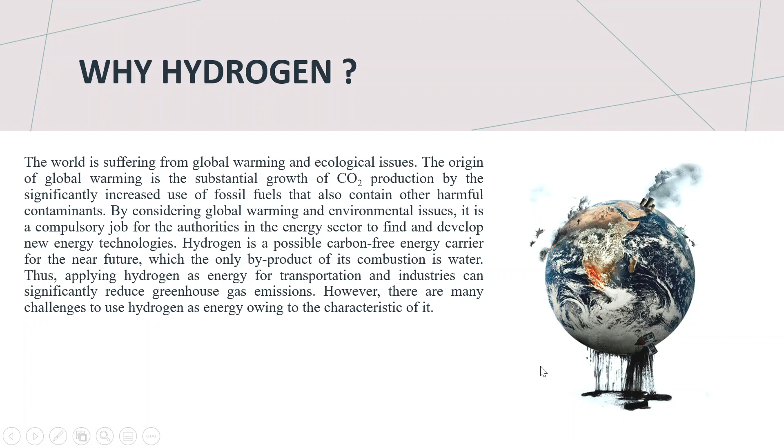For ease of transportation and storage of hydrogen gas, we have to liquefy the gas by raising the pressure on the gas, or by lowering the gas temperature to a freezing point. So liquid hydrogen is a cryogenic liquid that has a boiling point below the ambient temperature. It means that after a spill of some amount of liquid hydrogen, it will evaporate vigorously.

So a vapor cloud forms and diffuses, and this may cause explosion or pool fire. So problems arise with wide use of liquid hydrogen concerning its safe storage, transportation, and application. And as an initial step of safety, the evaporation of hydrogen during accidental releases must be understood, and a model of evaporation should be available.

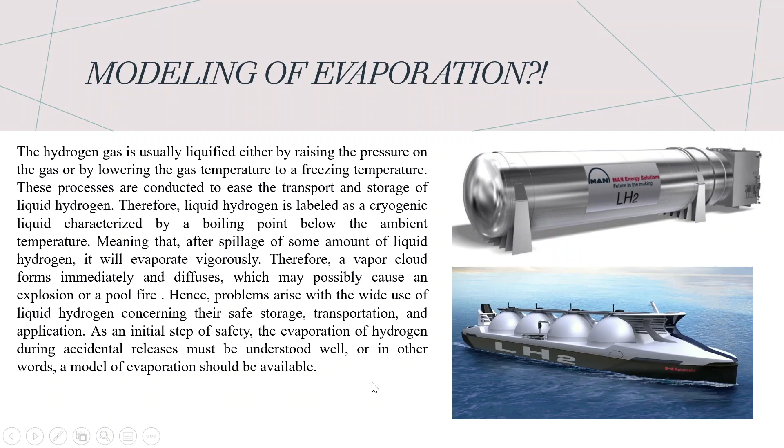To obtain this objective, a literature review on available mathematical models for the release of cryogenic liquids has been conducted, and after that the available mathematical models have been chosen to model the evaporation of hydrogen, and experimental data is used for model validation.

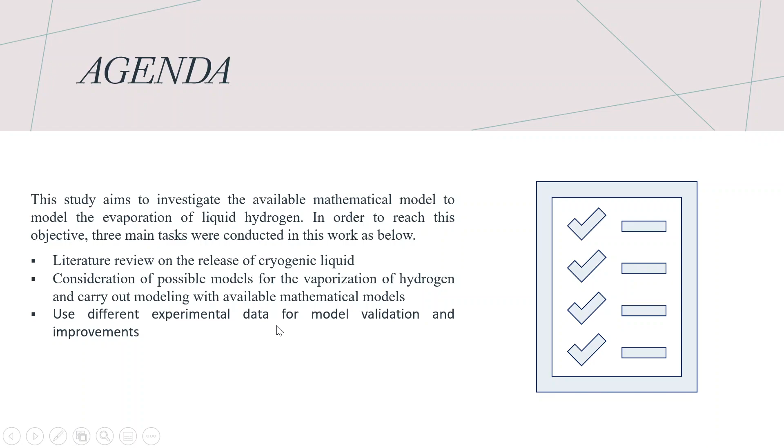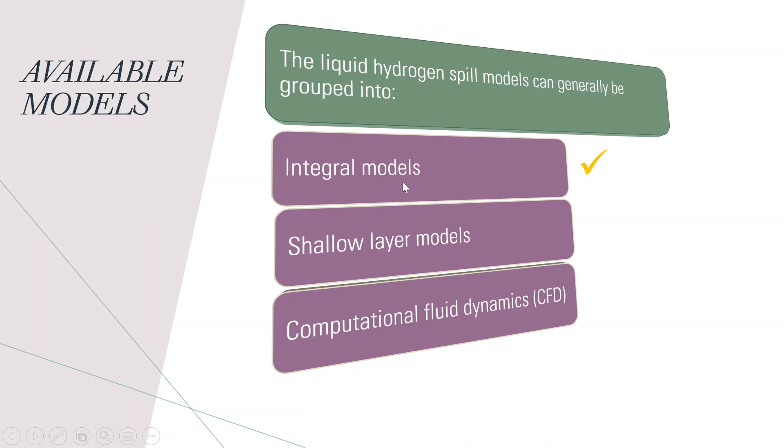After the literature review, it can be found that integral models, shallow layer models, and CFD models are available. In this work, an integral model has been chosen to model the evaporation. These integral models are namely the Briscoe-Shaw model, the constant Froude number model, and the gas accumulation over a spreading pool model.

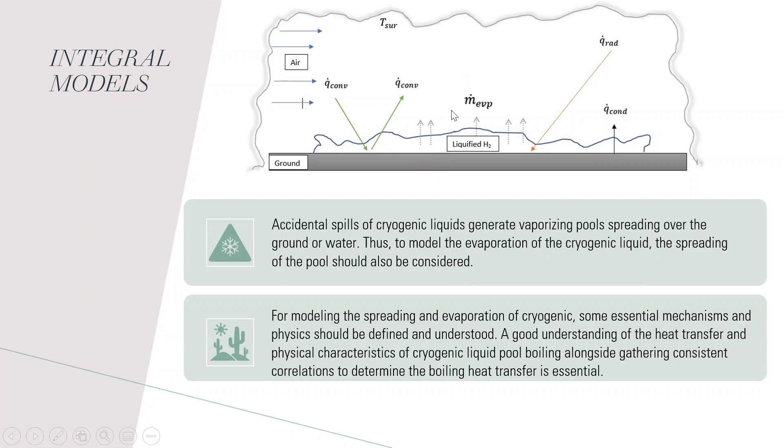For modeling of the evaporation, we have to also consider the spreading pool. After a spill of some amount of cryogenic liquid, it will spread over the ground, and it will simultaneously evaporate vigorously. So the pool boiling and spreading should also be considered.

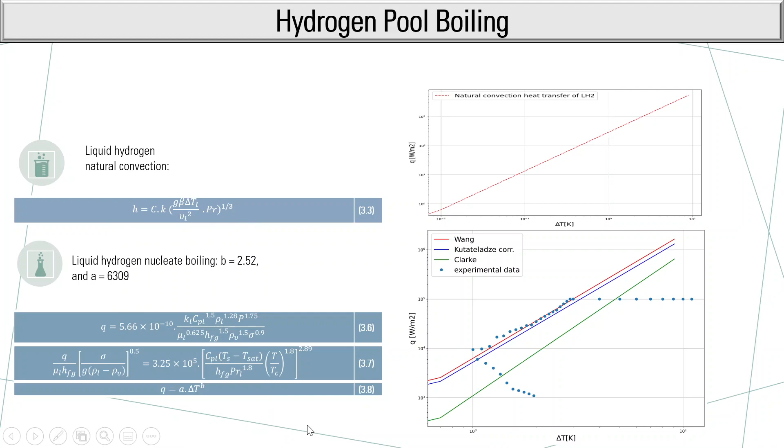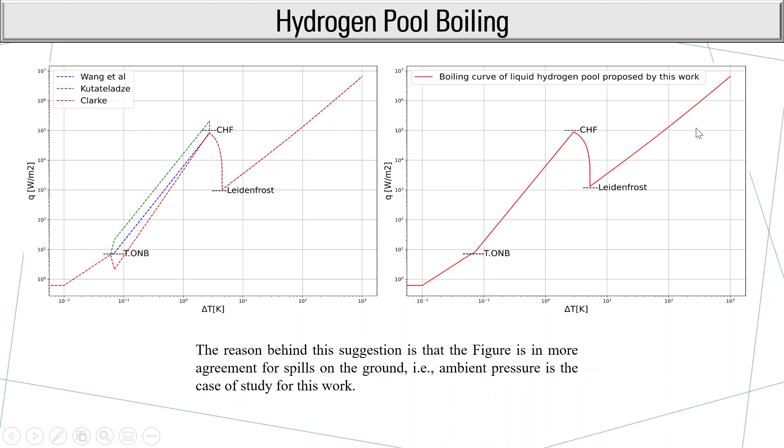To obtain this objective, different correlations for different boiling regimes are investigated, and as you can see here, different correlations proposed by different researchers have been investigated, and in the end the boiling curve of hydrogen is plotted.

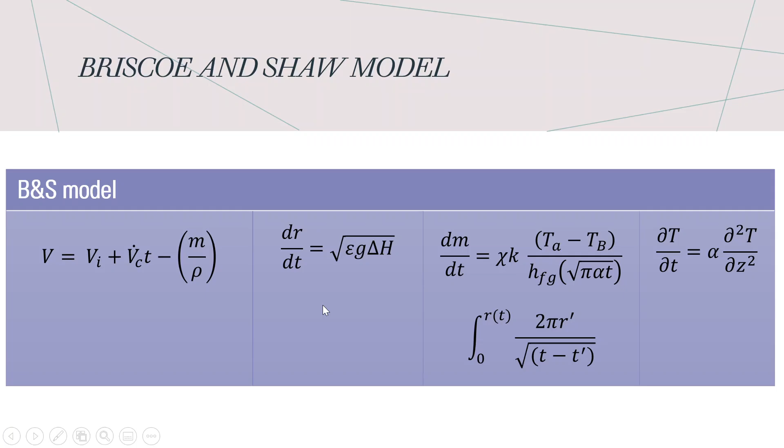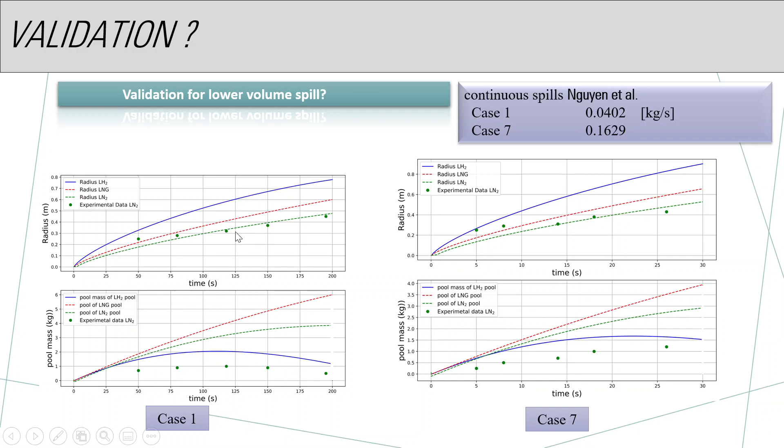For modeling of liquid hydrogen spreading and evaporation, the Briscoe-Shaw model is used as a first step, and as you can see here, it is a system of coupled differential equations that should be solved numerically, and it produces a roughly good graph that is in good agreement with experimental data.

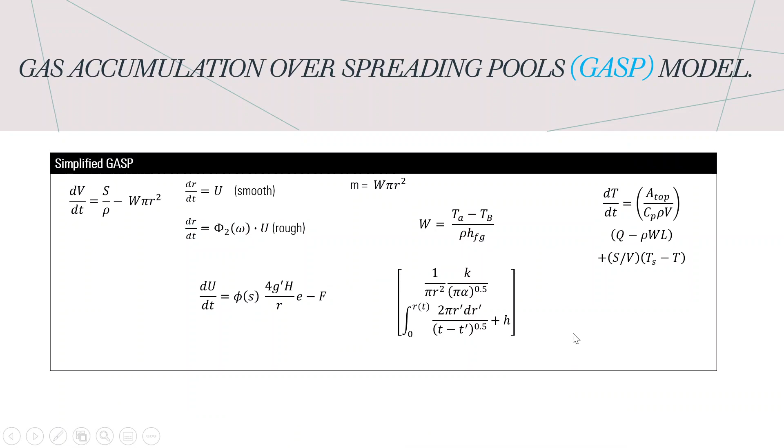And also the GASP model: the original GASP model was found difficult to solve numerically due to the enormous range of time scales. So a simplified GASP model is used, and as you can see here, it is in better agreement with the experimental data than the Briscoe-Shaw model.

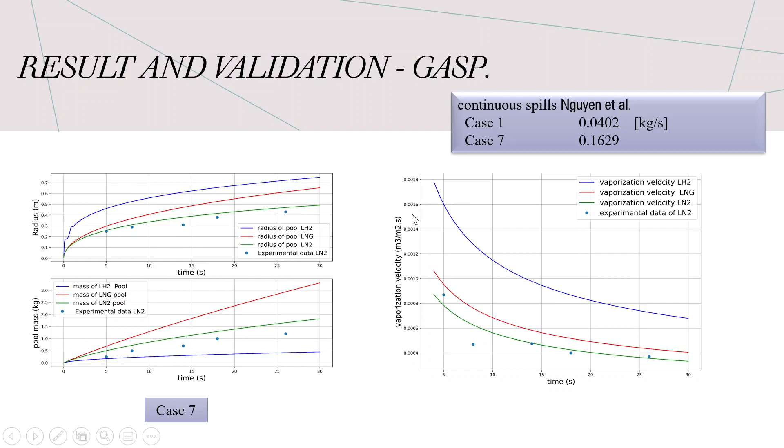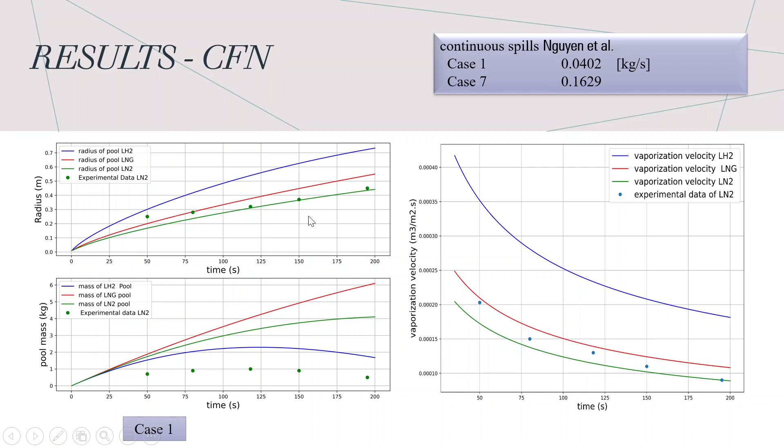And the CFN model is also used, which is a modified version of the Briscoe-Shaw model. And it can be seen that this model is also in roughly good agreement with the experimental data.

As a conclusion, we can say that the GASP model is in better agreement with the experimental data, and the CFN and Briscoe-Shaw models should be investigated a little more for improvement.